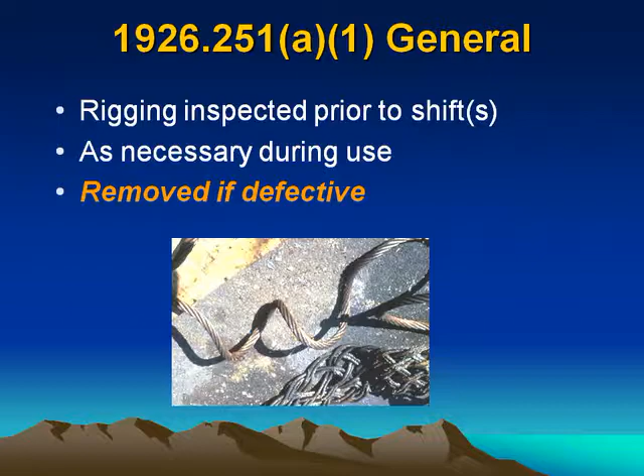1926.251 A1, General. Rigging equipment shall be inspected prior to each shift and as necessary during use, and shall be removed from service if defective.

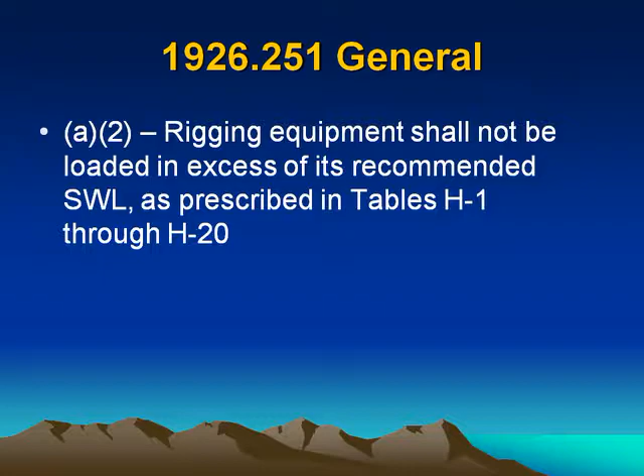A2. Rigging equipment shall not be loaded in excess of its recommended safe working load as prescribed in Table H1 through H20. A3. Remove rigging equipment from the immediate area when not in use.

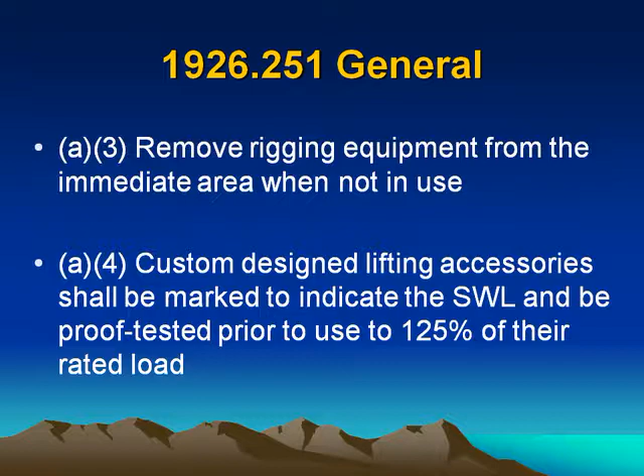A4. Custom designed lifting accessories shall be marked to indicate the safe working load and shall be proof tested prior to use to 125% of their rated loads.

Scope covers slings and hoisting material handling equipment: alloy steel chain, wire rope, metal mesh, natural or synthetic fiber rope of conventional three-strand construction, and synthetic web such as nylon, polyester, and polypropylene.

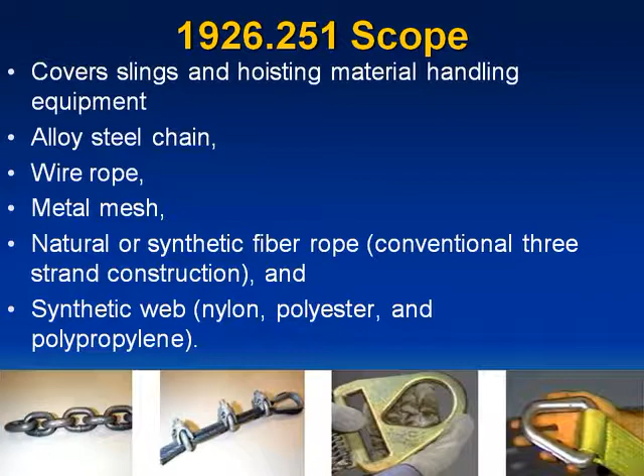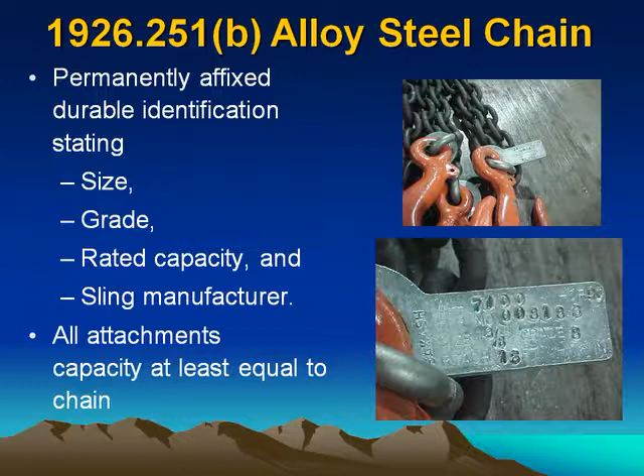Examples are given below. Alloy steel chain must have permanently affixed, durable identification stating size, grade, rated capacity, and sling manufacturer. All attachments must have capacities at least equal to the chain.

Alloy steel chains continued: job or shop hooks and links, or makeshift fasteners formed from bolts, rods, etc., or other such attachments shall not be used.

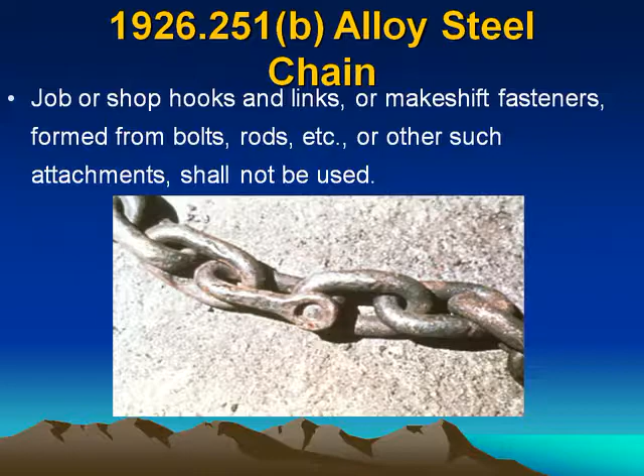B5. Whenever wear at any point of any chain link exceeds that shown in Table H2, the assembly shall be removed from service. Example of chain wear shown on this slide.

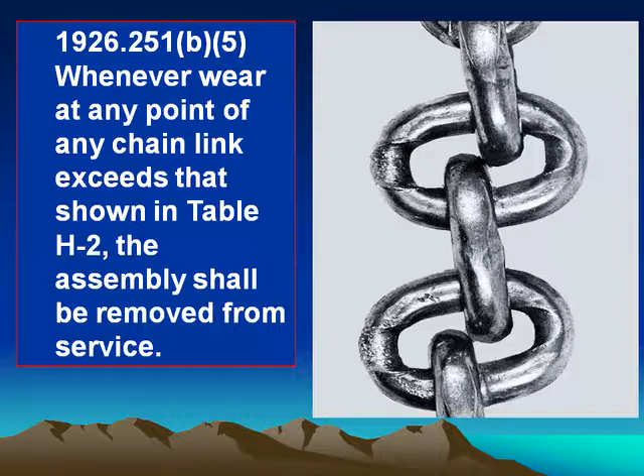Inspections are made and based on: A, frequency of sling use; B, severity of service conditions; C, nature of lifts being made; and D, experience gained on the service life of slings used in similar circumstances.

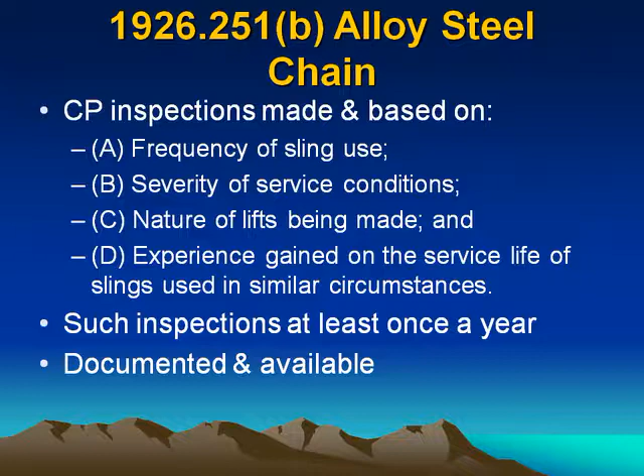Such inspections shall be made at least once a year, and documented records shall be kept available.

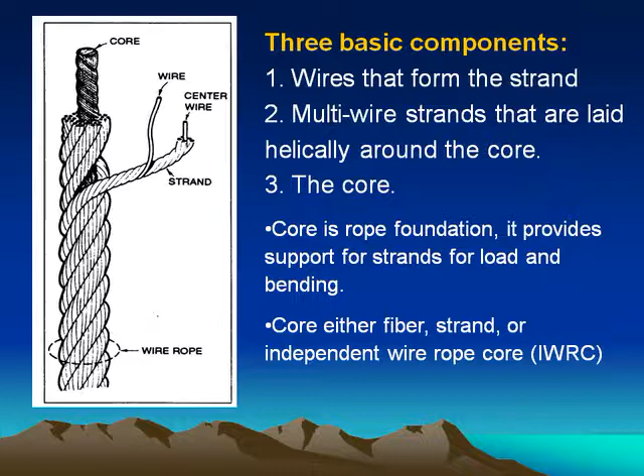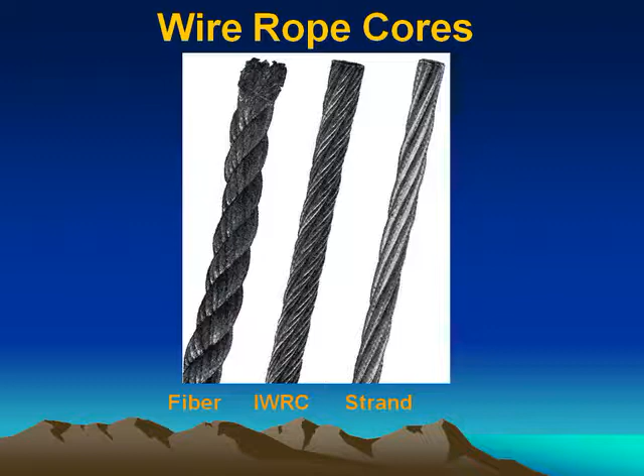The core provides support for the strands, for loads, and for bending. The core is either fiber, strand, or an independent wire rope core, IWRC. Wire rope cores: fiber, IWRC, strand.

Wire rope: follow manufacturer's safe working load recommendations, or Tables H-3 through H-14 for sizes, classifications, and grades not included in these tables. The safe working load recommended by the manufacturer for specific identifiable products shall be followed, provided that a safety factor of not less than 5 is maintained.

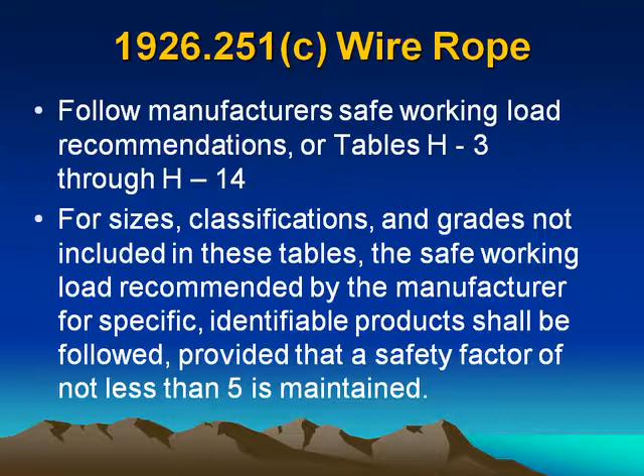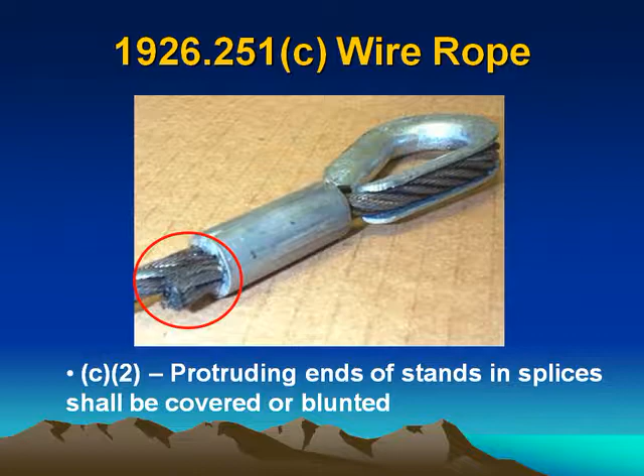Wire rope C2: protruding ends of strands in splices shall be covered or blunted. Example: seized end, tapered and welded end, or seized and torch cut with fused ends.

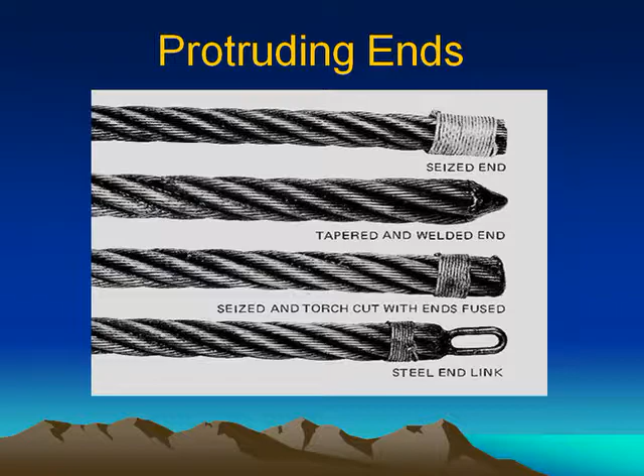Wire rope continued, C3: no knots in wire ropes except where permitted, such as haul back lines on scrapers. C4 I: eye splices must have not less than three full tucks.

C4 II: except for eye splices in the ends of wires and for endless rope slings, wire slings must consist of one continuous piece without knot or splice.

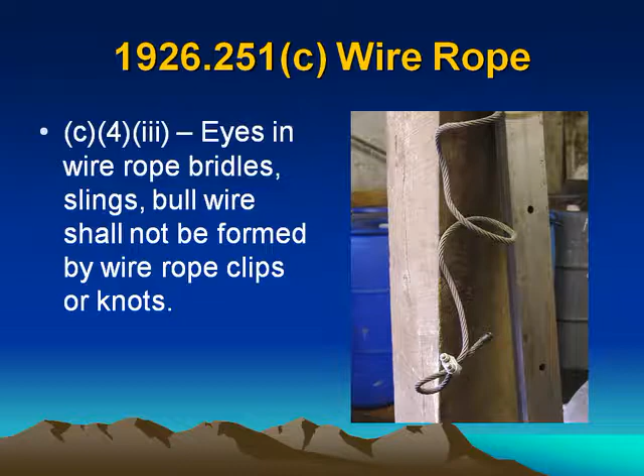C4 III: eyes in wire rope bridles, slings, and bull wire shall not be formed by wire rope clips or knots.

C4 4: wire rope shall not be used if, in any length of 8 diameters, the total number of visible broken wires exceeds 10% of the total number of wires, or if the rope shows other signs of excessive wear, corrosion, or defect.

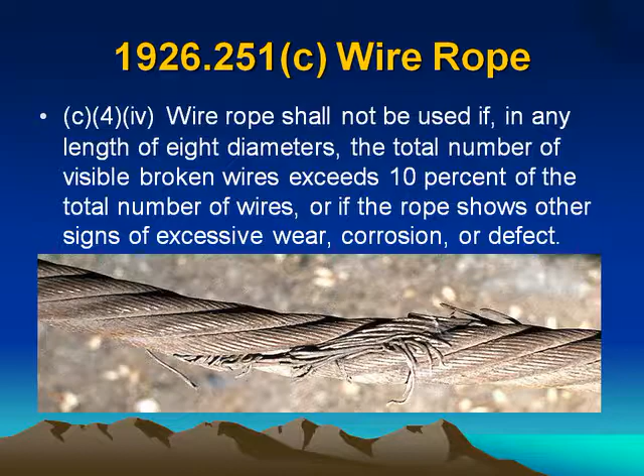Wire rope: a U-bolt clip shall be applied so that the U section is in contact with the dead end of the rope. Use Table H20 to determine the number and spacing of clips.

Never shorten a sling with knots or bolts. Protect slings from sharp edges. See the example given: never saddle a dead horse.

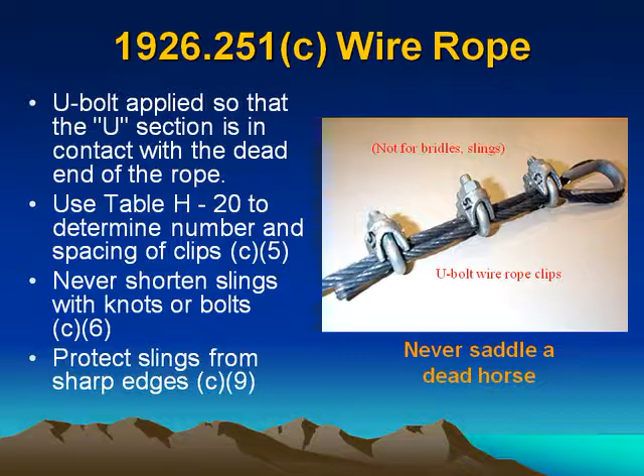Wire rope: never place fingers between the sling and load when tightening. Never apply a shock load when lifting.

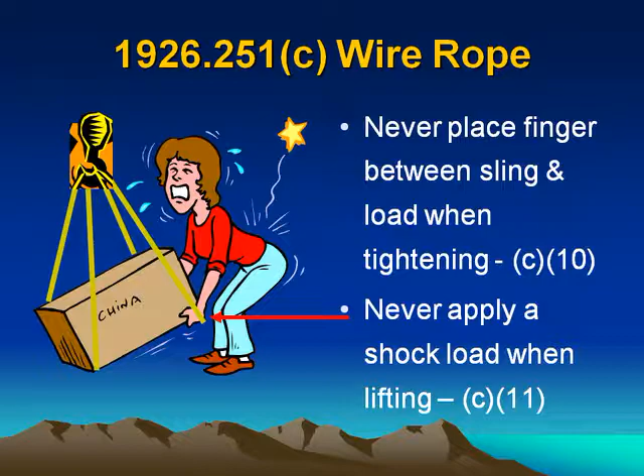C12: slings shall not be pulled from under a load when the load is resting on the sling.

C14: fiber core slings shall be removed from service if exposed in excess of 200 degrees Fahrenheit. Non-fiber cores used above 400 or below minus 60 degrees Fahrenheit should follow the manufacturer's recommendation.

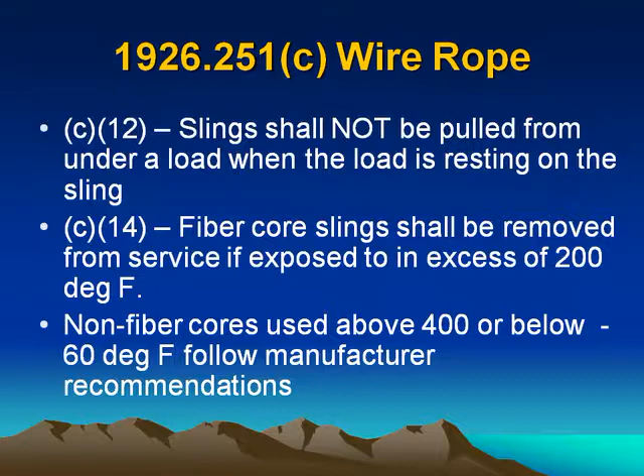Wire ropes, C15, end attachments: welding of end attachments, except covers to thimbles, shall be performed prior to assembly of the sling.

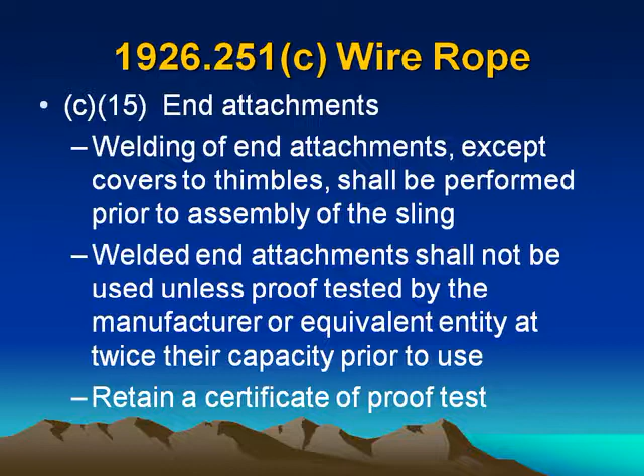Welded end attachments shall not be used unless proof tested by the manufacturer or equivalent entity at twice the capacity prior to use. Retain a certificate of proof test.

Lubrication: ropes and chains shall be regularly lubricated.

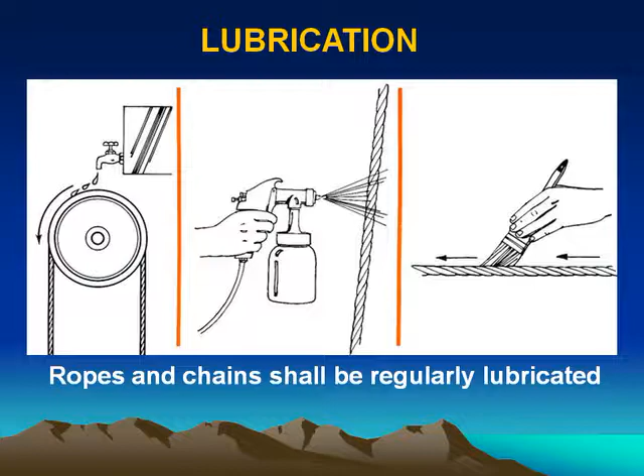Wire rope wear is based on: one, loading; two, bending, or the number of times bent; three, number of use cycles. Change in rope diameter is critical for determining retirement.

The area in a wire rope to check for wear is where it travels over the block, in the section from picking a load to lifting it.

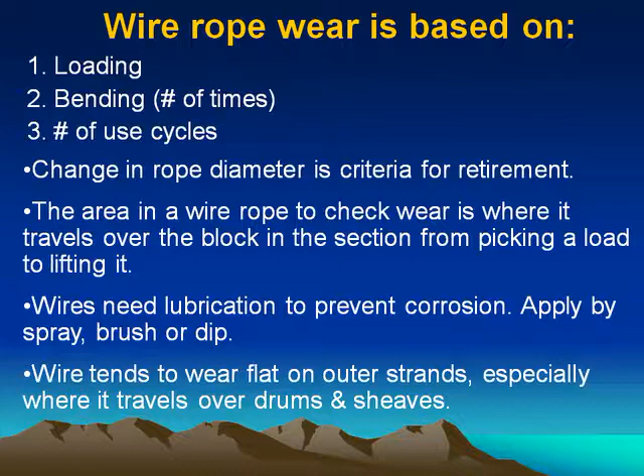Wires need lubrication to prevent corrosion, applied by spray, brush, or dip. Wire tends to wear flat on outer strands, especially where it travels over drums and sheaves.

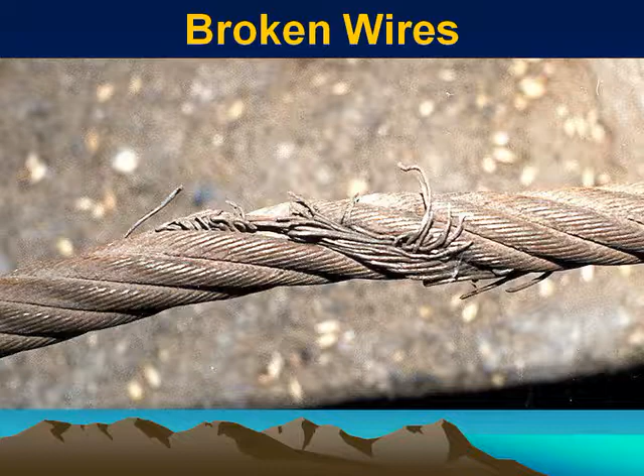This slide gives examples of broken wires and crushed wires, and shows the correct way to inspect a wire's diameter.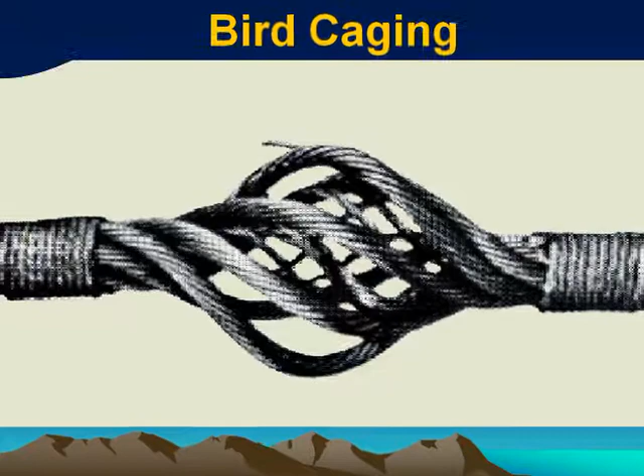General industry regulations for wire rope slings, 29 CFR 1910.184 F5, removal from service.

Criteria include 10 randomly distributed broken wires in one rope lay, or 5 broken wires in one strand, and wear or scraping of one-third the original rope diameter of outside individual wires.

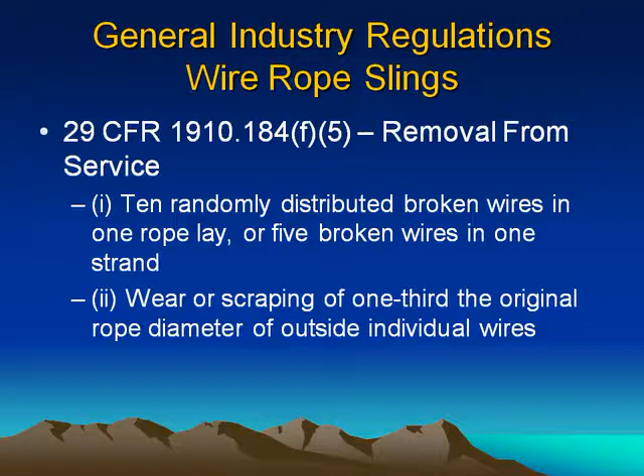Natural and synthetic rope. Tables H-15 through H-18 apply. Knots are not to be used instead of splices.

Remove from service if there is abnormal wear, powdered fiber between strands, broken or cut fibers, discoloration, or rotting.

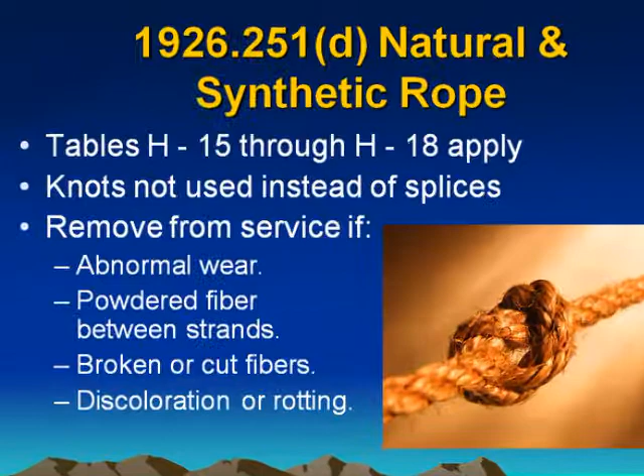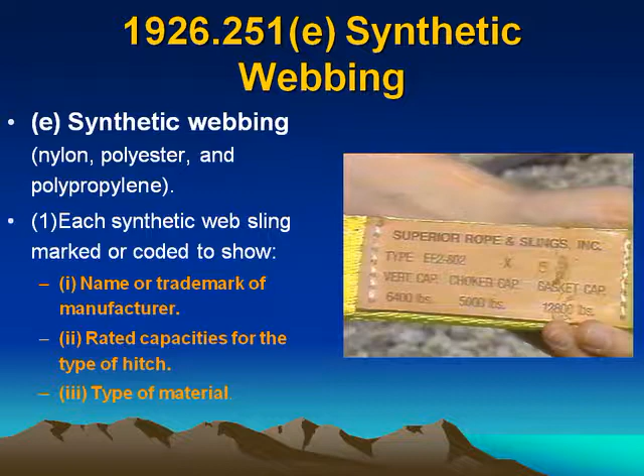Synthetic webbing, section E: synthetic webbing made of nylon, polyester, or polypropylene. Each synthetic web sling must be marked or coded to show the name or trademark of the manufacturer, rated capacity for the type of hitch, and type of material.

Synthetic webbing should not be used around acid or phenolics. Remove from service if there are acid or caustic burns, melting or charring of any part of the sling surface, snags, punctures, tears, or cuts, broken or worn stitches, or distortion of fittings.

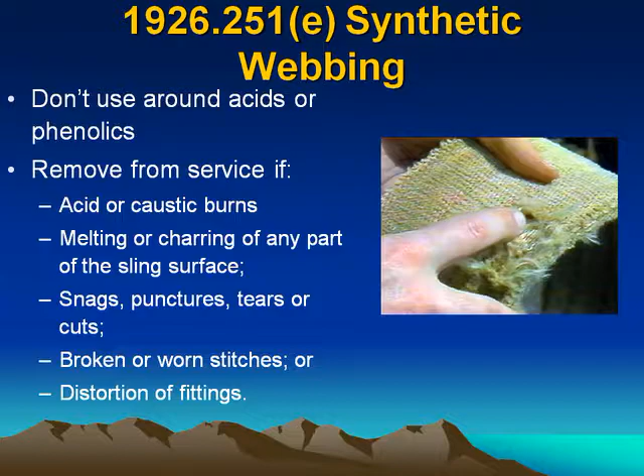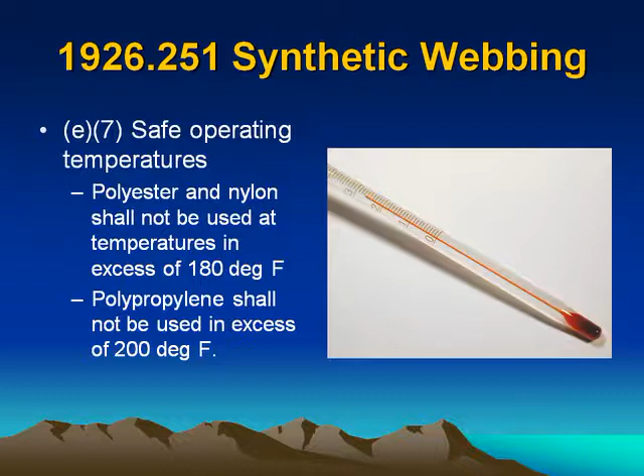Synthetic webbing, E7, safe operating temperatures. Polyester and nylon shall not be used at temperatures in excess of 180 degrees Fahrenheit. Polypropylene shall not be used in excess of 200 degrees Fahrenheit.

Shackles and hooks: shackles. Use Table H19 or use manufacturer's recommendations for higher SWL, provided that a safety factor of not less than 5 is maintained.

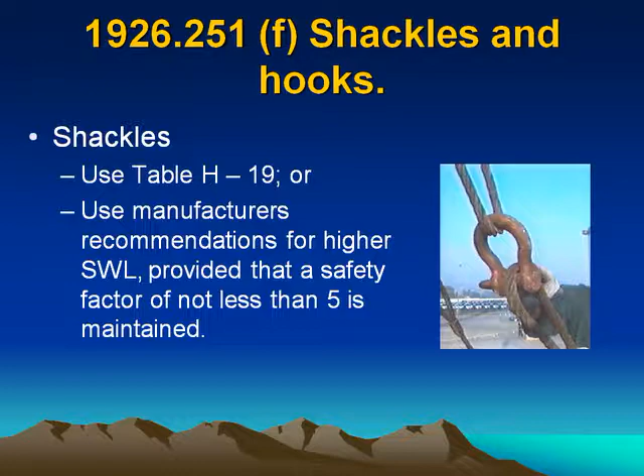Shackles and clevises: check for wear in the clevis, in the bowl of the saddle. Check the pin for straightness and wear. Check for distortion in the open end of the U.

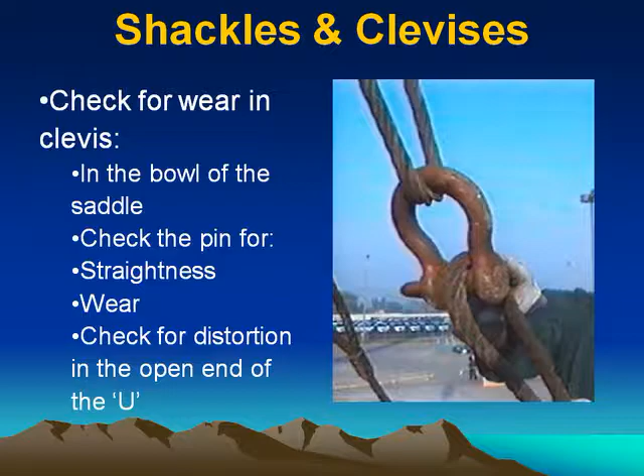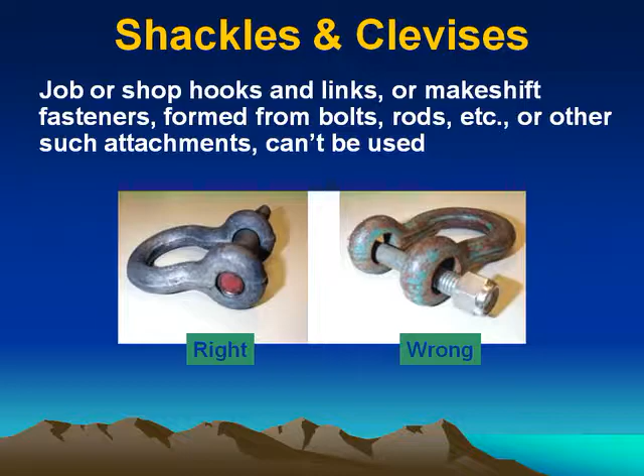Shackles and hooks continued: hooks. Use manufacturer's recommendation. When no applicable manufacturer recommendations are available, all hooks shall be tested to twice the intended safe working load before they are initially put into use. Maintain a record of the dates and results of such tests.

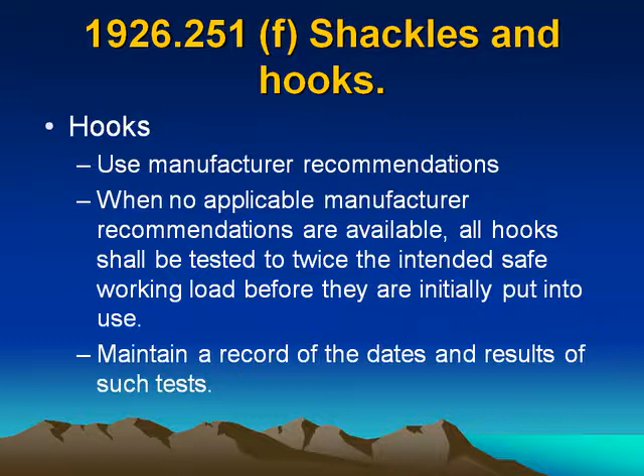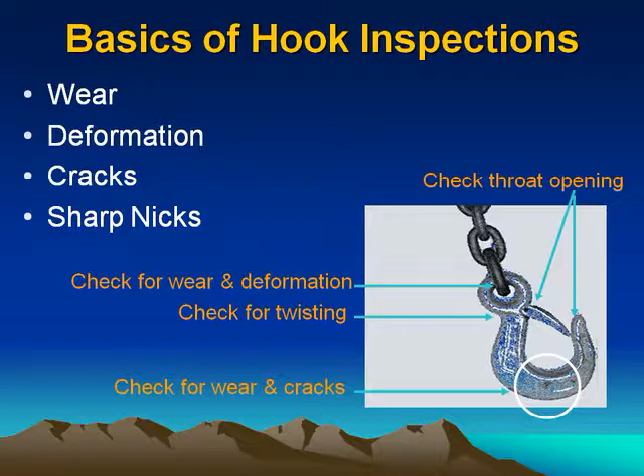Basics of hook inspections: check for wear, deformation, cracks, and sharp nicks. Check throat opening for wear and deformation. Check for twisting, wear, and cracks.

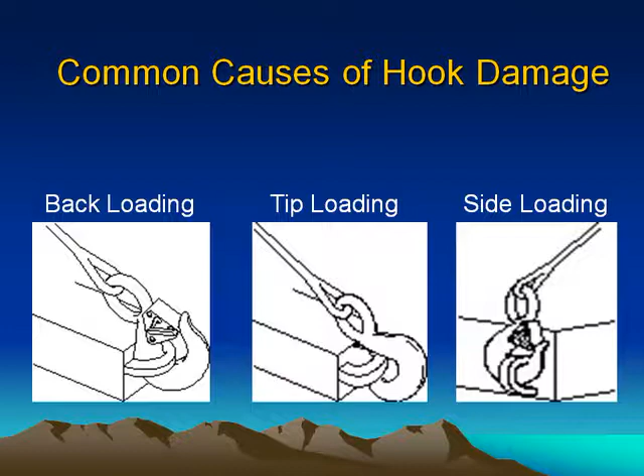Common causes of hook damage: backloading, tip loading, side loading. Only foundry hooks are designed for tip loading.

Hook and load angles. In the example shown: A, balanced, 100%. B, one-quarter off center, 86%. C, one-half off center, 80%. D, three-quarters off center, 70%. E, point loading, 40%.

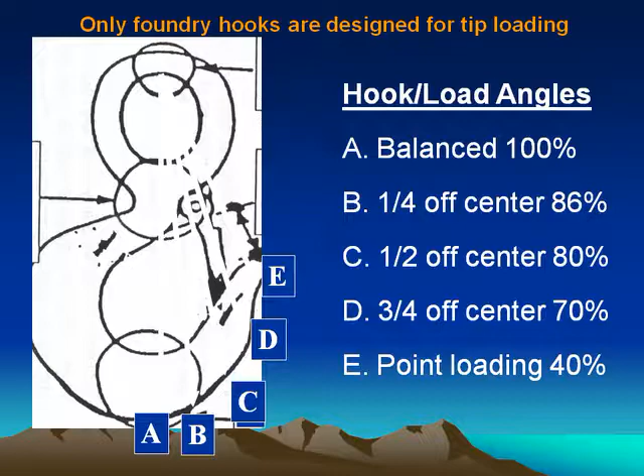Rigging safety. Between the trolley hook and the load is the rigging: ropes, slings, chains. OSHA requires slings to be inspected daily.

Proper storage when not in use, suitable protection of rigging when in use, and attention to items with sharp corners, etc.

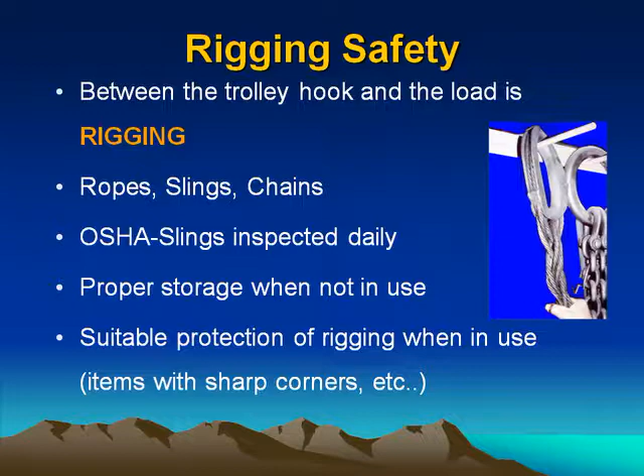Rules for rigging safety: 1. Know the weight of the load. 2. Know the center of gravity of the load. 3. Make load attachments above the center of gravity of the load. 4. Select a hitch that will hold and control. 5. Know the rated capacity of slings and hardware.

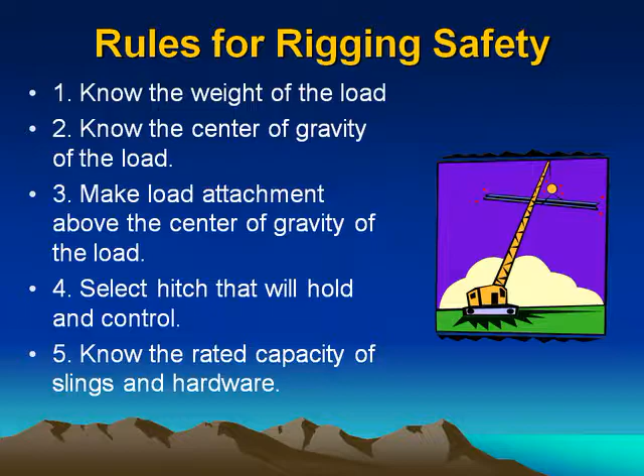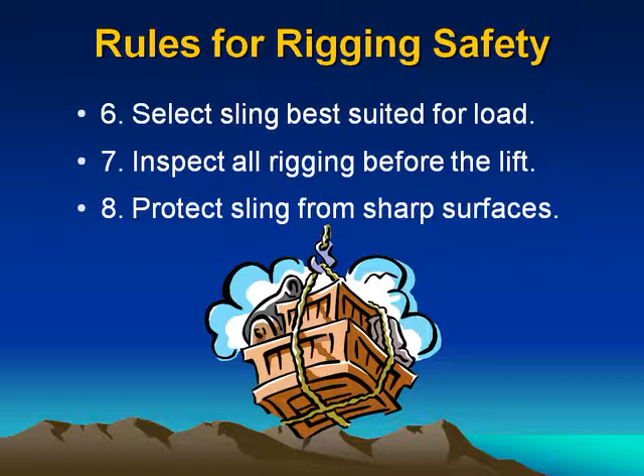6. Select the sling best suited for the load. 7. Inspect all rigging before the lift. 8. Protect the sling from sharp surfaces. 9. Properly calculate the increased tension caused by sling angle on all rigging components. 10. Allow for the D/D ratio on all slings. 11. Calculate the reduction when using a choker hitch.

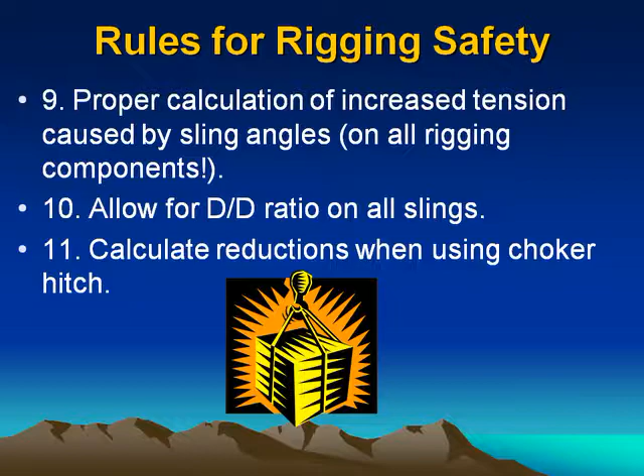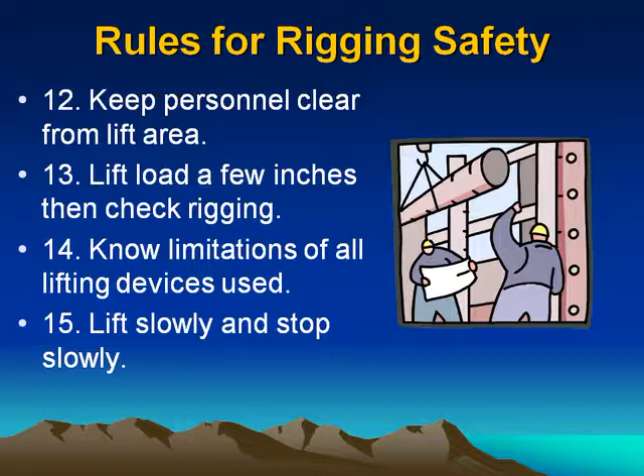12. Keep personnel clear from the lift area. 13. Lift the load a few inches, then check the rigging. 14. Know the limitations of all lifting devices used. 15. Lift slowly and stop slowly.

The load on quadruple branch slings seldom has the load evenly distributed among the 4 branches. For this reason, sling charts for quad branch slings set the load limit for quad branch slings to the equivalent rating for a triple branch sling of the same type.

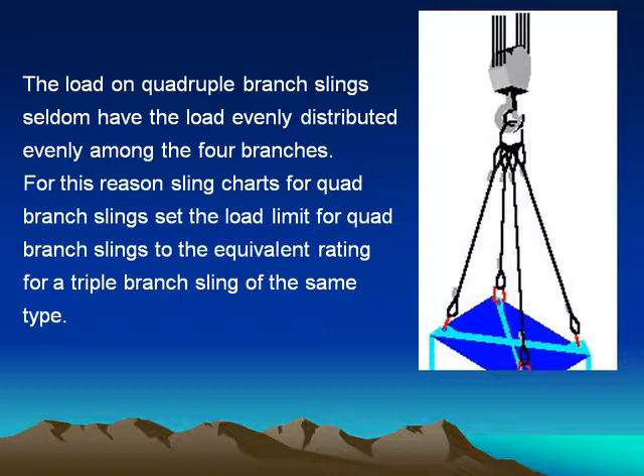Straight sling: the total weight of the load is supported by a single leg. The working load limit of the sling must exceed the load.

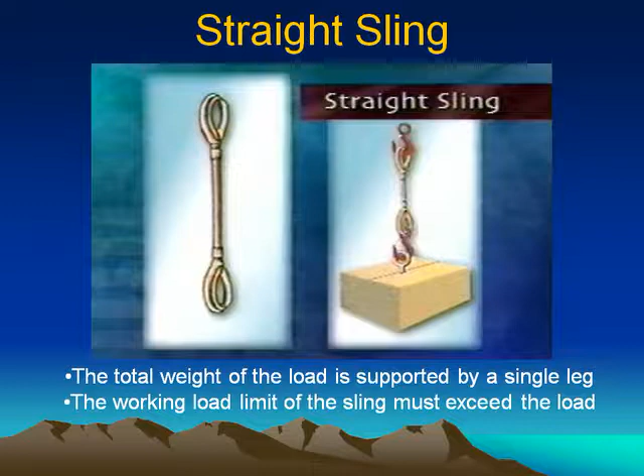Example of a choker sling. Example of a basket sling. Example of a bridle sling. Examples of various slings; please examine the slide at your convenience closer.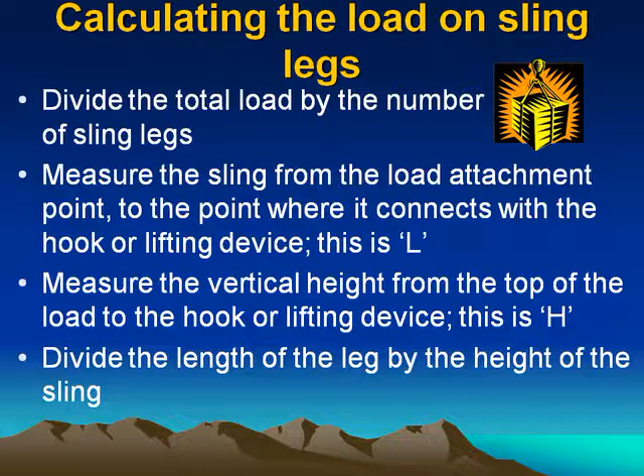Measure the vertical height from the top of the load to the hook or lifting device. This is H. Divide the length of the leg by the height of the sling. This slide shows the equation used for determining the load on each sling leg. Please study it carefully.

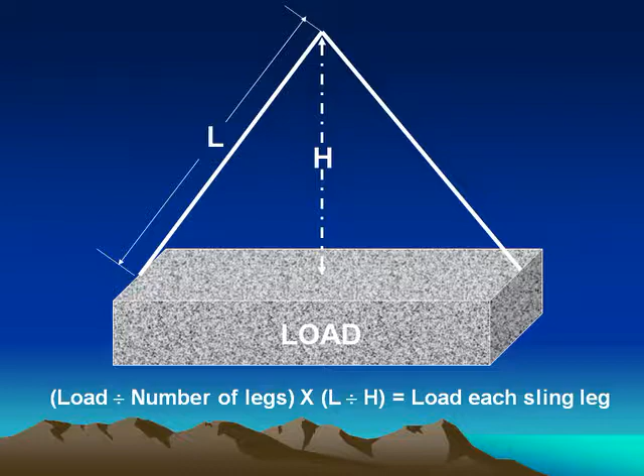Example: load equals 30,000 pounds, 2 load legs. Divide 30,000 pounds to get 15,000 pounds per leg if using a vertical hitch. Sling legs are 15 feet, and the height from the top of the load to the lifting device is 10 feet. 15 divided by 10 equals 1.5. The load on each leg is 1.5 times 15,000, equaling 22,500 pounds.

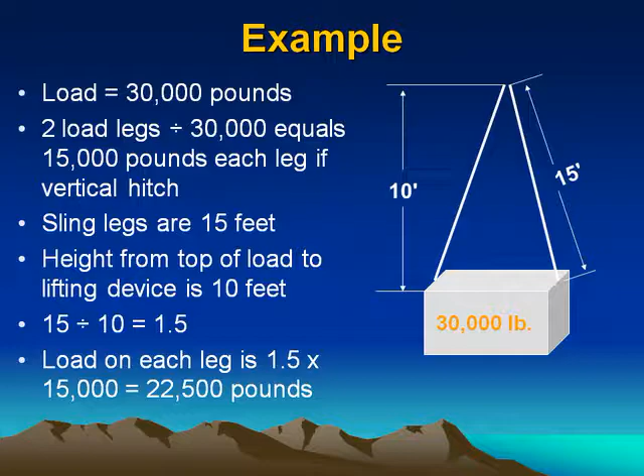Center of gravity: a load is stable when the hook is directly above the center of gravity of the load. Estimate the center of gravity, then lift the load just enough to clear the ground. If the hook is not over the center of gravity, the hook will travel to the center of gravity.

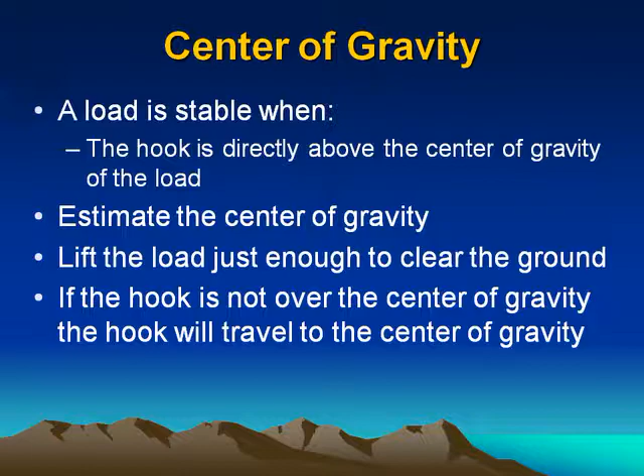The following are examples of center of gravity; please take a moment to study the slide.

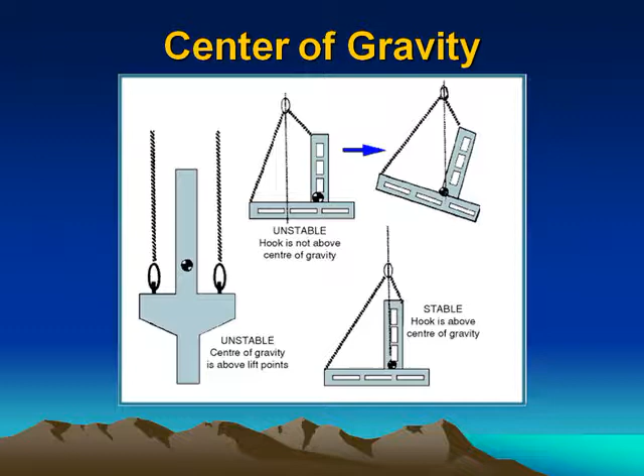This completes the presentation of Subpart H, Rigging.